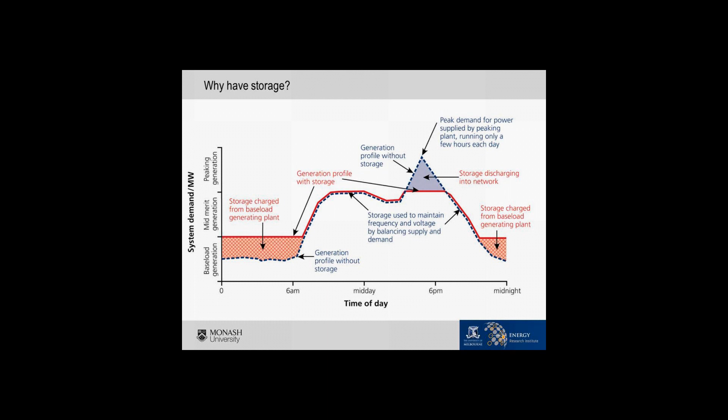And so I forgot to put a plot in, but I should have shown the duck curve, which I'm sure you've heard of, that as the penetration of PV goes up, we're actually seeing a decrease in the afternoon peak demand, because PV effectively works as a demand reducer. And so we're actually seeing that low price events, low demand events are happening in the middle of the day rather than the middle of the night. As far as the storage is concerned, it doesn't really care. Its job is to look at whenever there's low demand, soak up the excess power and put it back onto the grid during the peak times.

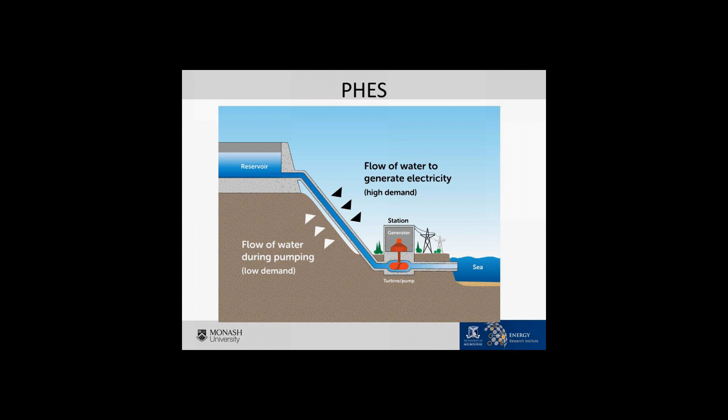In this particular schematic, we've got the penstock above the ground here, because that's what we're planning on doing at Cultana. Quite often the penstock can be in a tunnel and go underground via this path. But usually the arrangement is pretty much the same. Top reservoir at the top of the hill, bottom reservoir obviously at the bottom. In this case, it's going to be the top end of the Spencer Gulf.

The physics of pumped hydro is pretty straightforward. You've got the potential energy is the mass times gravity times h, the head height. So the bigger the head, the bigger the elevation difference, the more energy you can store for the same amount of water. So it's fairly critical to be able to have a cost-effective scheme is to have a reasonably good head height. And the studies we've done at the University of Melbourne showed that 100 metres was the absolute minimum, and if you had above 200 metres you're pretty happy. If you get up to 300 metres then life's looking pretty good. So that's the sort of scenario, elevation difference we're looking at.

If you use that straightforward mathematics, a 100 megalitre reservoir, that would be 100 metres by 100 metres by 10 metres, so a large farm reservoir if you like. If you had 300 metres of head, that would store 294 gigajoules, which is the same as 82 megawatt hours. So 82 megawatt hours, if you have a 20 megawatt plant, that's 4 hours of storage. So we're sort of just trying to give you a sense of what the scale of this kind of thing is.

People often ask me, could we put pumped hydro in our high-rise buildings? Well, we had a tank at the top of the building and we ran water up and down. You can do the mathematics and you can show that you'd have to have actually quite a large tank, because even a skyscraper, you might be lucky if it's 300 metres high. So if you're going to store the amount of energy that's required in a building like that, you're probably going to need to fill up a fair amount of the building with water. So it's not really a goer. But the maths is very, very straightforward.